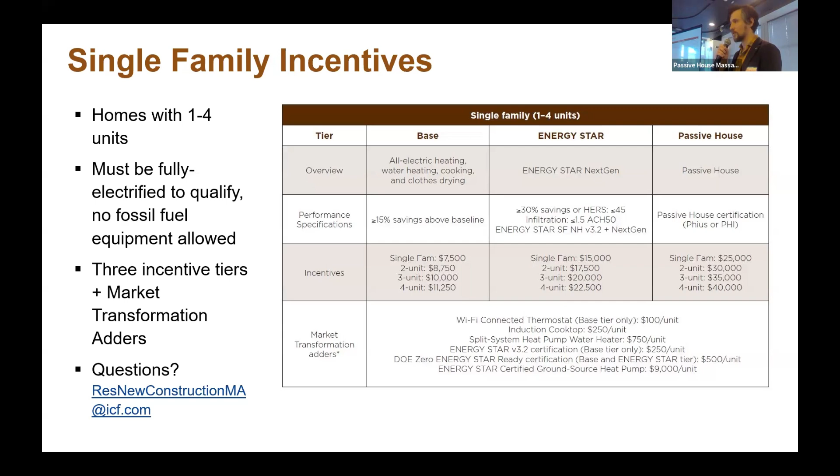There are single-family incentives, $25,000 for a single-family one-unit building, increasing for larger units. But as the topic of today's discussion and much of our monthly meeting series is multifamily residential, I'd like to particularly highlight the $750 Mass Save incentive for projects achieving certification with either PHIUS or PHI, and then $3,000 per unit. Both of these are per unit after achieving certification, again with either PHIUS or PHI. And that's in addition to other market transformation adders.

We're also going to talk about some strategies that we use at Callahan and Kurt's used at the Building Advisory Group, and how to really execute well and keep quality top of mind, which is really important for our PHIUS projects.

So I want to start just by looking at the life of a project, right? Overall, we go through site work, foundations, slab on grade, framing, envelope. There's components to each section here within PHIUS, but we're going to focus today on framing, envelope, MEP, thermal insulation, and substantial completion. And with that, I'm going to hand it to Kurt.

Great, thank you, Chris. So this first picture is really for PHIUS raters or verifiers in terms of the stud count. I've always found it interesting in multifamily construction that if they're going to assume you have one stud every 16 inches, that's a drastic underestimation of the actual count of studs. On this bearing wall, you can see it's all double studs, triple studs, kings and jacks are all doubled, with solid LVL headers going across. So in just that wall assembly, I'm guessing it's probably 30 or 40% reduced in insulation value.

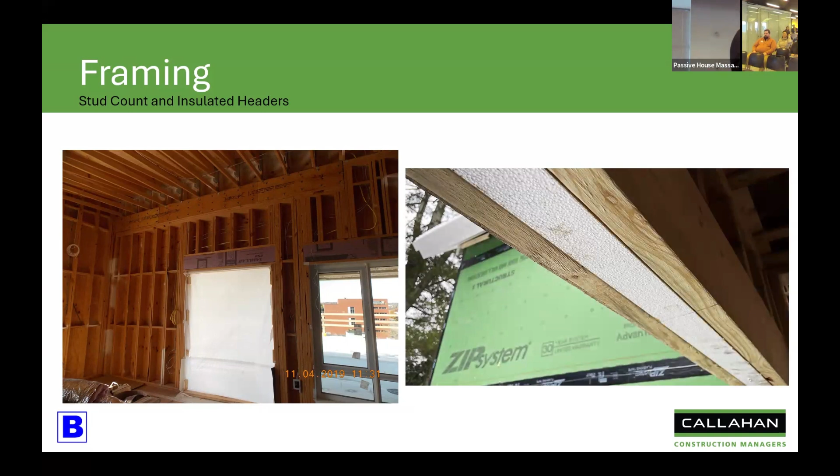So if we can insulate headers, door and window headers, it's recommended if the structural loads allow it. You can see that these headers here are thermally broken. Doesn't always happen, but it's recommended if we can do it, we should.

This is one of Chris's projects in Salem. What Callahan found out was that by changing the exterior sheathing to ZIP System, you no longer had to prime the OSB for your WRB. So it was a cost-effective move to change your cladding.

Okay, we're going to the envelope.

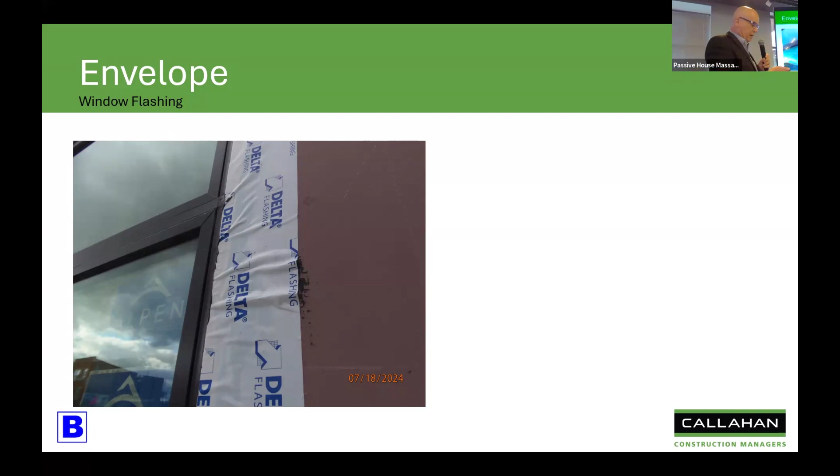This project here, it's critical to always get your flashing, taping and membranes flat and flush. You can see in this photograph, you've got wrinkles where there's going to be air gaps, so there's a chance your window might not pass air pressure testing due to this flashing installation. Here's a photograph of the way we'd like it to look.

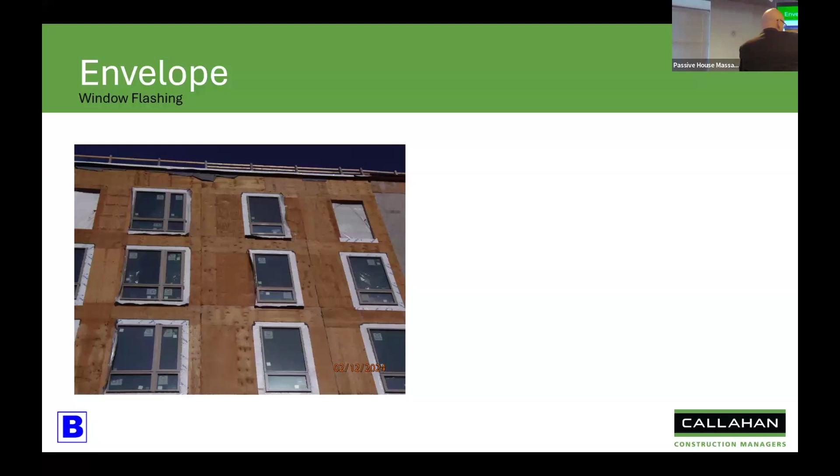On this project, all of the pre-flashing for the windows peeled away from the substrate. We never found out if it was due to temperature or moisture control issues, but every single window, the flashing came loose around the perimeter. So by waiting until the wood dried out, we installed primer around all the windows, and that allowed the pre-flashing to re-adhere.

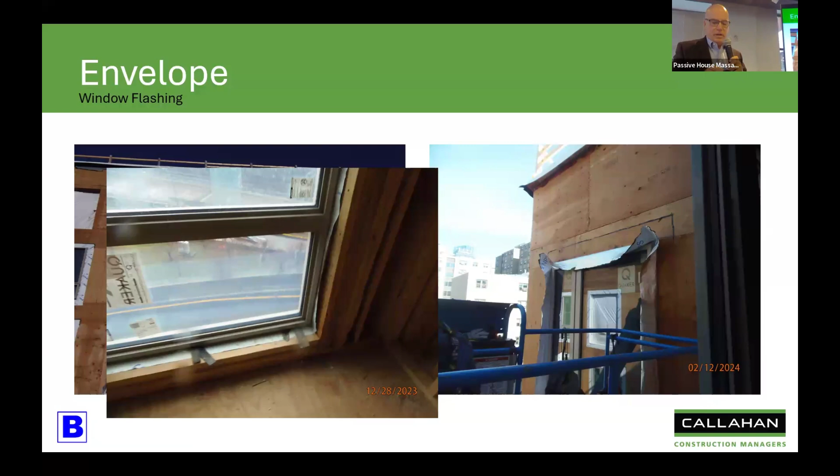It also came loose on the head jamb and sills. On these, a heat gun was used once the moisture content of the framing dried out, and it was able to re-adhere. We had to have SIGA come in and do pull tests to make sure the adhesion was correct, and again, just to make sure our moisture content is correct for all the materials being installed.

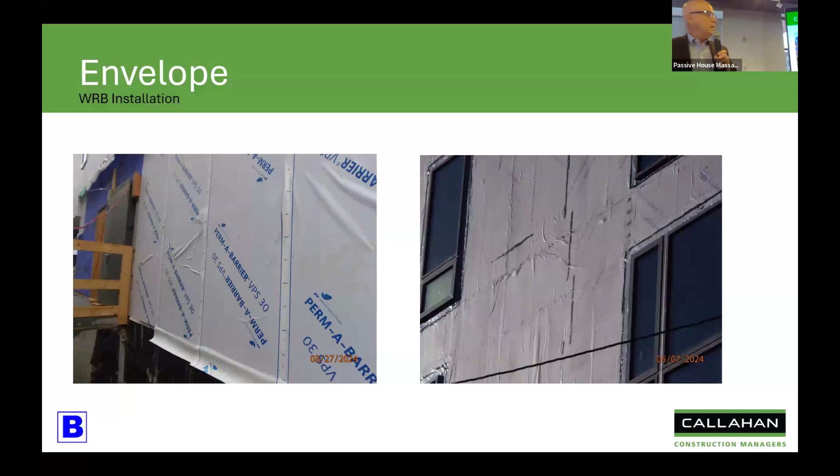Again, another photo of how a deficient WRB is in place. The substrate needs to be flat and flush prior to the WRB. When you have protrusions on your skin and install the structural girts, there's a chance you're going to create a penetration through your WRB, so all of that needs to be smooth before the girts are installed.

In this photograph, the mason was searching for studs for all of his anchors. Every inch or so, he'd drill a pilot hole through the envelope looking for the stud, and then your waterproofing contractor would have to come back and patch all the holes he made. This kind of issue is really resolved with communication. If your subcontractors understand the process and principles, hopefully they won't be doing this.

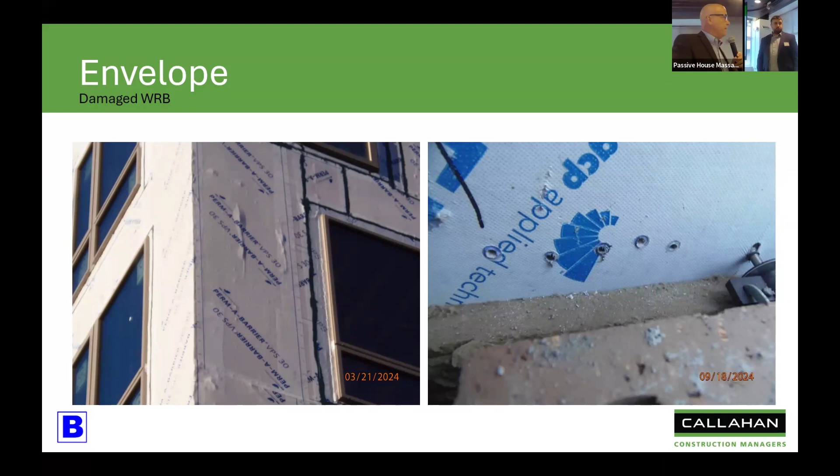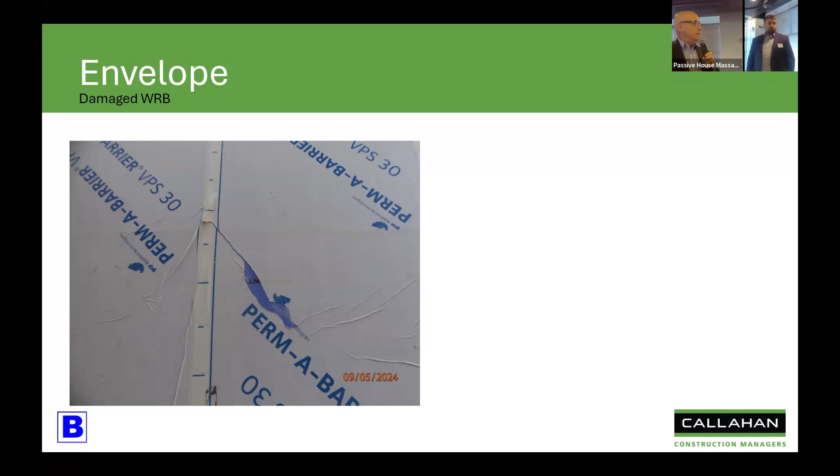Again, just a tear - the WRB is so sticky that you can't just peel it off and reapply. When you try to peel it off, that's what happens. So it's a nightmare to try to fix deficient WRB.

This photograph, the girts that were installed were in the wrong location, so the cladding contractor had to remove all the girts, and that left holes in the WRB. So again, your waterproofing contractor had to come back and patch and repair every penetration that was made.

Mock-ups - make sure that you get mock-ups for almost every system involved in your building. Make sure all the material is procured well ahead of time - your windows, your clips, your cladding - because it needs to be done well ahead of time, so that it's an actual in-place mock-up of the true conditions of your construction.

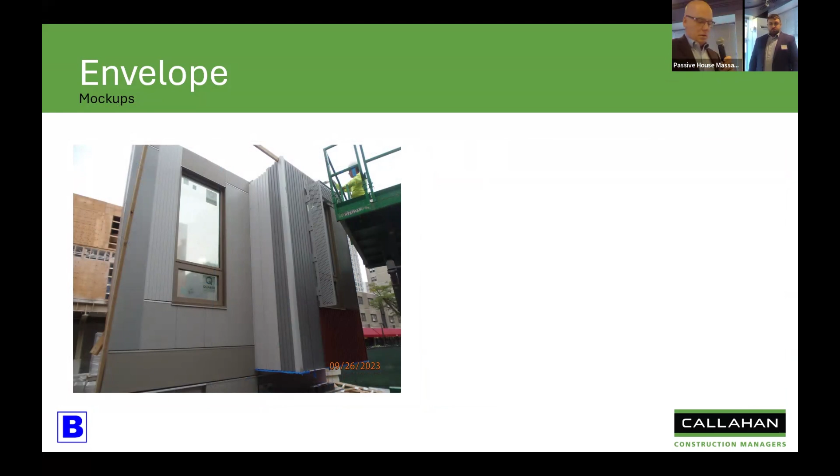This window mock-up in Chicago was fiber cement boards, all pre-drilled, so the girts had to be in the exact locations. We spent weeks and weeks going through this window mock-up until it was done right. We suggest you don't do your window testing until all the cladding is done, because the cladding is going to create more penetrations. So we always recommend window testing be done after the cladding is complete.

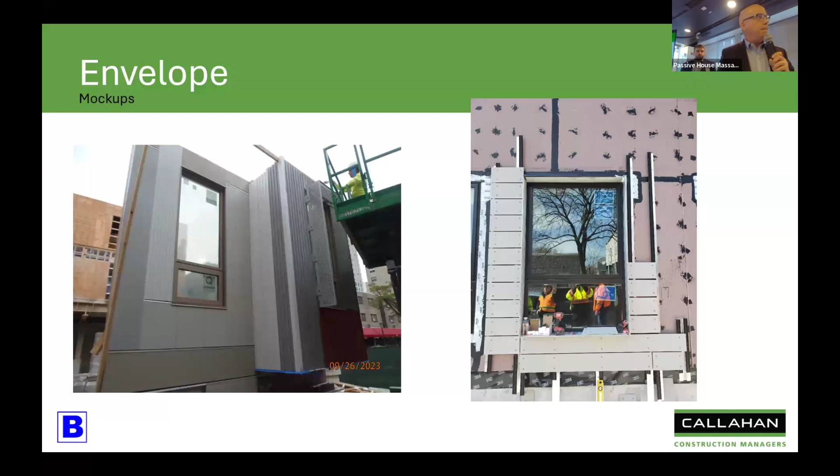This is the same project in Chicago. All the windows were installed in the factory, brought out to the site - insulation was done, pre-flashing was done, windows were done. So you can avoid the issue I showed earlier where all the pre-flashing failed in the windows.

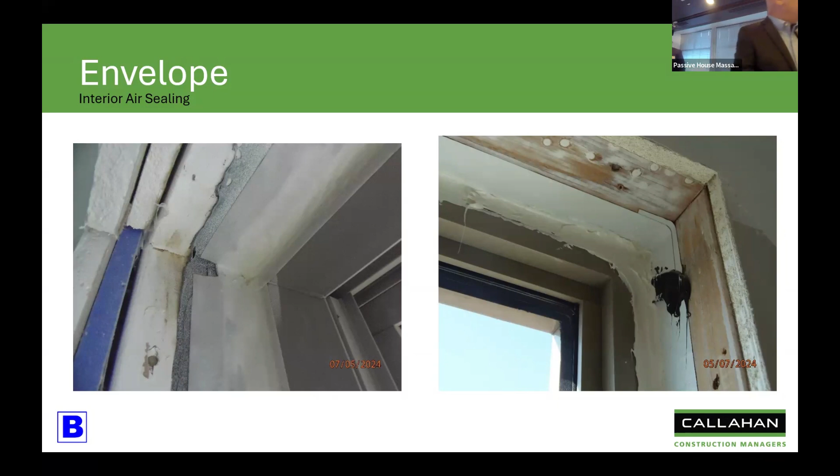For interior air sealing, typically use Fentrim tape that seals your window frame to your pre-flashing, but the Fentrim tape needs to be continuous, especially around the inside corners. Caulking needs to be done with care, needs to be tooled into the joints for a better air seal. You can see in that picture, that's not what we want to see for caulking.

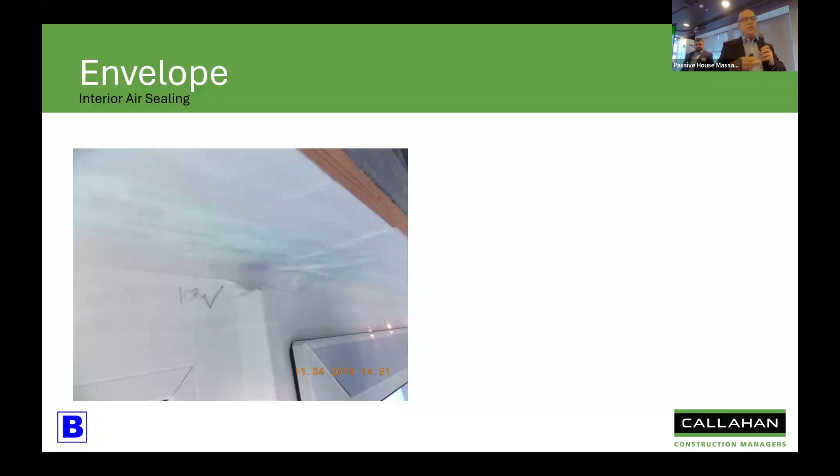When windows are mulled together, there's a chance that the mullion or snap cover is going to create an air loss. This is the top of the window head, and it was not passing our air test because air was getting down through the snap cover and through the window frame. So it's really ideal if you don't mull windows. You obviously can, and most jobs do have mulled windows, but your air testing is going to get better results when you have single pane windows.

This is the same picture at the sill where the Fentrim tape was applied to cover that snap cover. This window was removed and relocated, so you can see all the nail holes from where it was originally installed. It's going to get taped, but it just leaves another potential for air loss.

Keep in mind this window shim - I'll show you in the next photograph why that's important. If that window shim isn't taken out, the Fentrim tape is just going to run over it, and that's going to leave a gap on each side of the window shim.

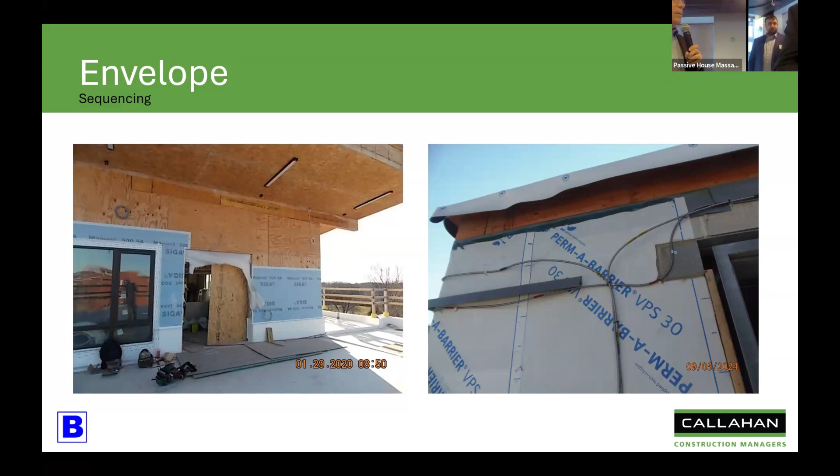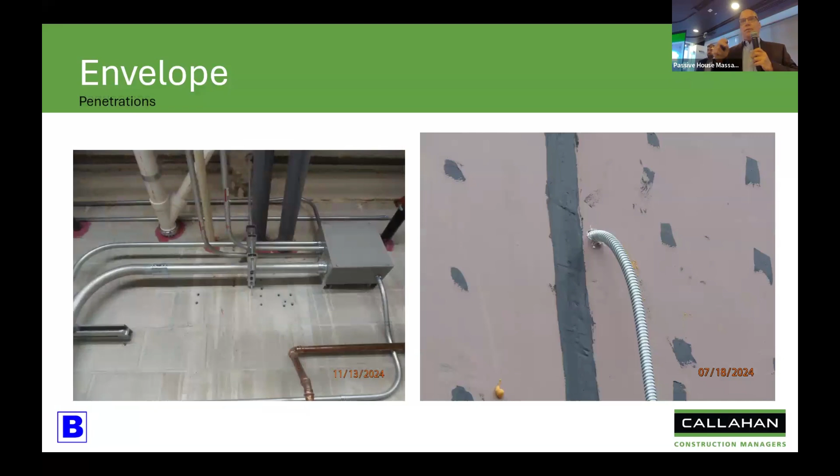CMU walls - every penetration should be sealed. So when you have MC cable or wires penetrating through your exterior wall, it's best to have one hole and one wire. Don't make a bigger hole for two wires, because it's much more difficult to air seal.

The windows are typically triple glazed in passive house construction. They're very heavy, and you can see that the way these were being stored on site was putting a significant load on the window mullion, which could potentially affect the air seal and the integrity of that joint.

Also, the dust and debris in these units will get into your windowsills. Typically, if you have that kind of debris in your windowsill, the window is not going to close - it won't seal tight to the gasket. It's a potential for air loss. So when architects do your punch, it's important to open up every window and look at the tracks to make sure they're clean.

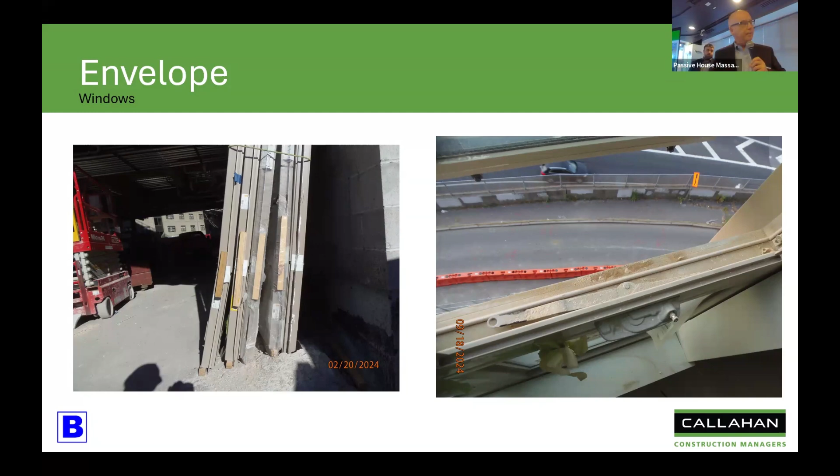Termination and protection of membranes and flashings. You can see in this picture that was the finished condition. The architects need to make sure that every condition, and there's a lot of them, is going to be terminated and protected so that you don't leave these kinds of exposed conditions.

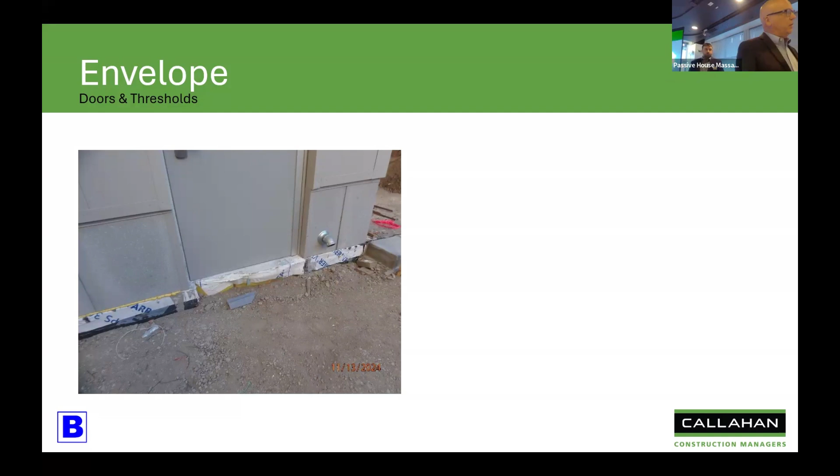This photo is just a liquid membrane on the CMU as opposed to the peel and stick WRB.

All right, so just because it's installed properly the first time doesn't mean it's not going to get damaged over the course of construction. You can see here this is the corner of a building - it was a tight site in Cambridge. What ended up happening is the skid steer drove by and clipped the corner just a little bit too tight. We noticed it.

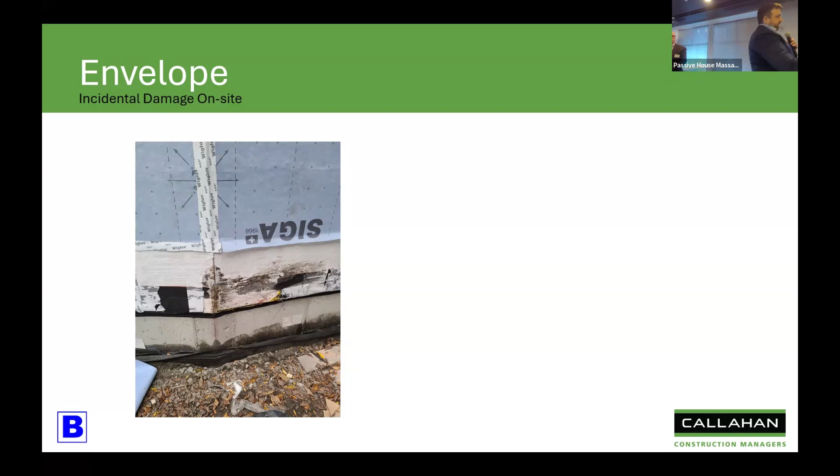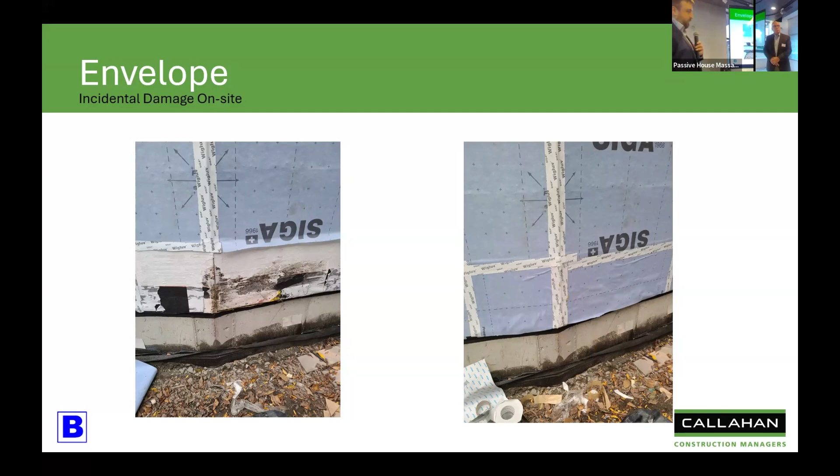The WRB installer went through and tried to fix it. It might be hard to see here, but they fixed the SIGA wrap, but what they didn't do was tie in the Fentrim tape to the underside of the SIGA wrap. So you still end up having the air seal issue, where you don't have continuity between the black Fentrim tape on the underside of the sheathing tying up into the SIGA wrap. Just because they fixed it doesn't mean they fixed it right - we've got to make sure we're looking for the QA/QC in order to make sure we're doing it properly.

Sometimes it's not quite as obvious - sometimes we end up with material hitting the corner of buildings, and we end up busting the corner up. If we weren't looking up, we probably wouldn't have seen this. So again, just paying attention to the potential issues that happen after the material is already installed is extremely important.

The way that we do that at Callahan is we actually go through and do a QA/QC inspection as soon as it's installed to make sure it's installed properly, and then again right before anything is going to go over top of it. We do that by - you can kind of see here - we take a marker, so on SIGA we can just take a marker.

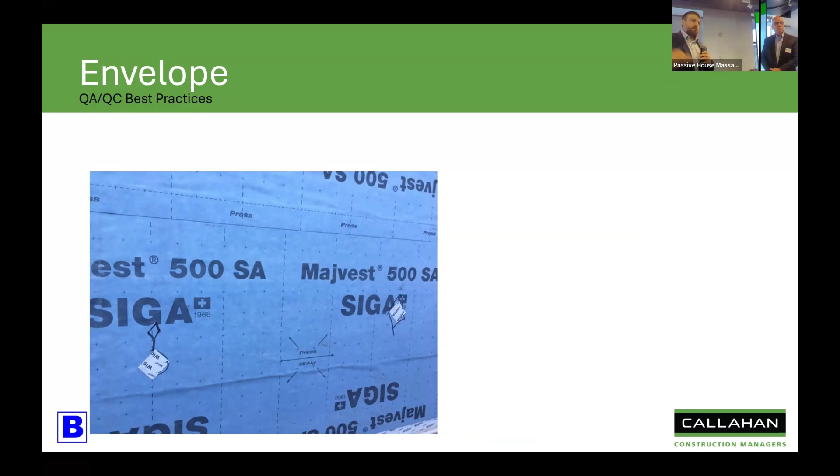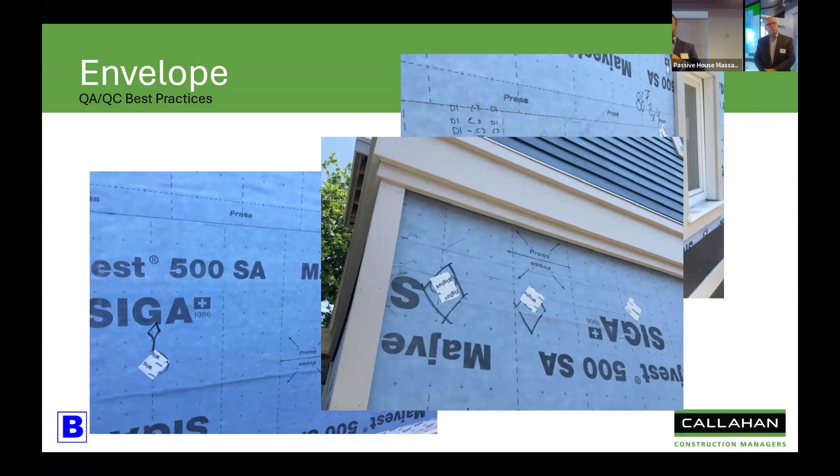We actually go through and get up on the lift or ladder, whatever means we need, to view all the different parts of the WRB, and we mark them up. Then from the ground, it's very easy to see if they completed all the patching required—you can see the circles and arrows. Sometimes I miss it, right? So it's important to do the QA/QC right when they install the product to make sure it's installed right the first time. But right before it gets covered up, if you don't make that last check, you're going to end up with holes you're never going to find.

So I want to take this a little bit different route. When I do passive house drawing reviews as a builder, there are two locations I really look at to make sure there's continuity in the area. The first one is the trash rooms and trash chute, and the second one is the laundry room. Let's look at the trash rooms first.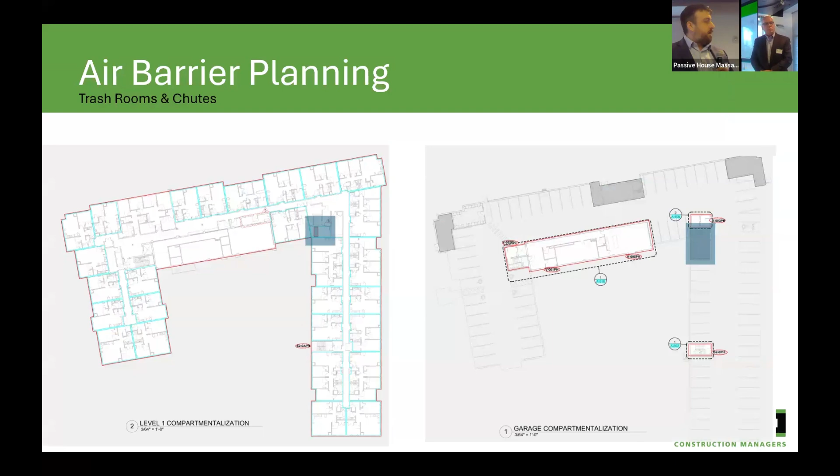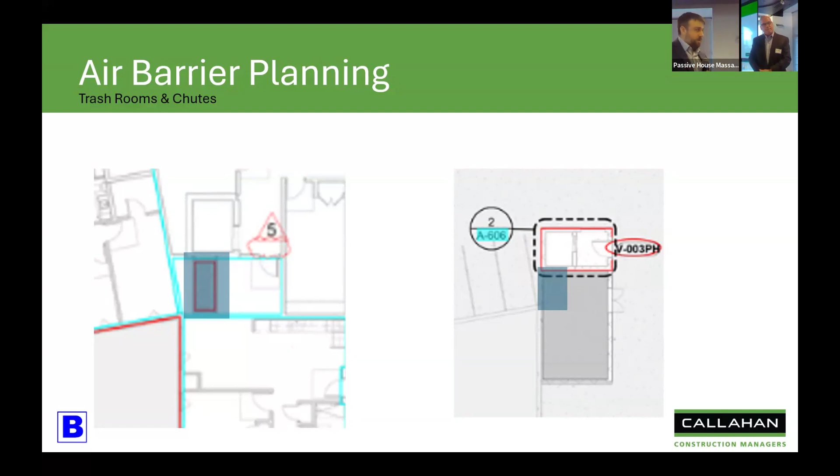On this job, the trash room is located right here in the corner of the building, and you can see this is the compartmentalization plan. They excluded the chutes in this job, and the trash room is also excluded, which is excellent, right? So we take a closer look at the detail here.

It looks like a pretty standard detail. As we zoom in, we see the air barrier located on the inside of the chutes, kind of sandwiched between the sheathing and the GWB, but that's a means and methods problem for us. As we look at this, we have a seal on the inside where the trash chute door is—that's our main leak, right? So there's a problem here.

If I have air coming down the trash chute, it's going to make it up into that cavity, get into the ceiling, and from there who knows where it's going to go—I end up with an air leak. So when I'm doing drawing reviews, one of the first things I'm looking at is the trash chute doors and the continuity of the air barrier, typically at the roof, at the trash chute doors, and then as it gets down into the trash room itself.

So how do we fix this? This is a super simple fix. We put in an RFI on this job and it ended up working out great—we're just going to take that AVB and wrap it right in so that it hits the gasket on the inside of that trash room door. That should eliminate that air seal leak.

So let's look at another project. This one's in New York—an 8-story block and plank building. You can see on this compartmentalization plan that they didn't exclude the trash chute or the trash room in this building.

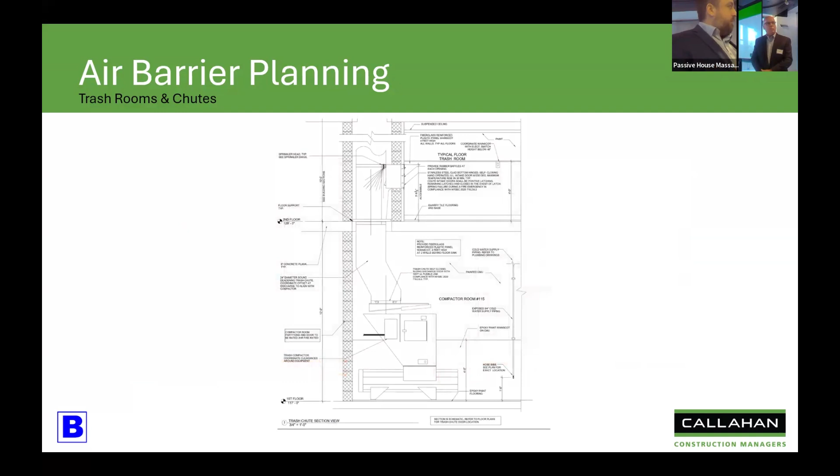Take a closer look—it's a singular chute with a singular compactor. But when we look at the detail, there is no AVB on the inside or outside of that trash chute CMU. CMU is porous; you will get air leaks through it, I promise you. If you don't get them right away, as soon as that grout shrinks, you'll end up with some sort of crack, which is an air leak waiting to happen. So we end up with a similar issue to the other job, but right now there's no provision to actually fix this.

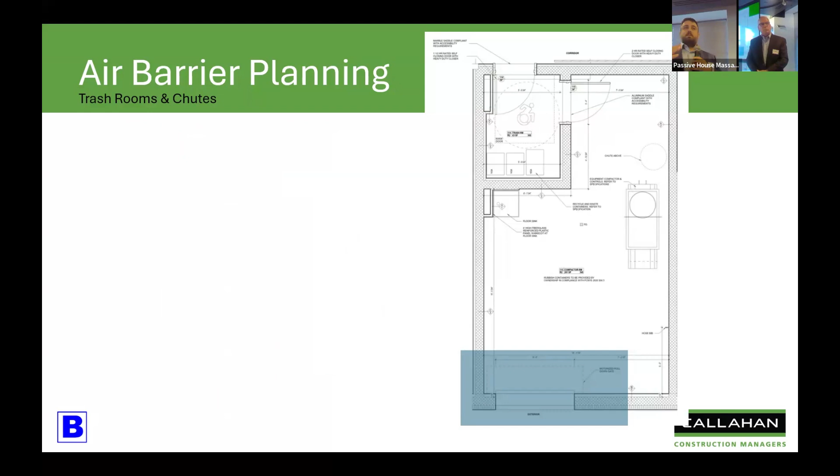So as of right now, there's an RFI in to see what we're going to do about this trash chute. Now if we go down to the trash room, the first thing I'm looking at is that since it's part of the compartmentalization, we need to make sure it's completely sealed. On this project specifically, they have a motorized roll-down gate. If anybody's tried to air seal a motorized roll-down gate, it's impossible.

Fun fact, right? So we go through and look at these things and say, hey listen, this is not going to work. As the builder, we want to provide you guys with a building that's going to pass, and in our experience, there's no way to do it the way this is going right now. So the easy thing to do would be to exclude it—we can throw a fire-certified door on the inside of the trash room, seal that up, seal up the trash room itself. Not as easy a fix as the first one, but still very fixable, right?

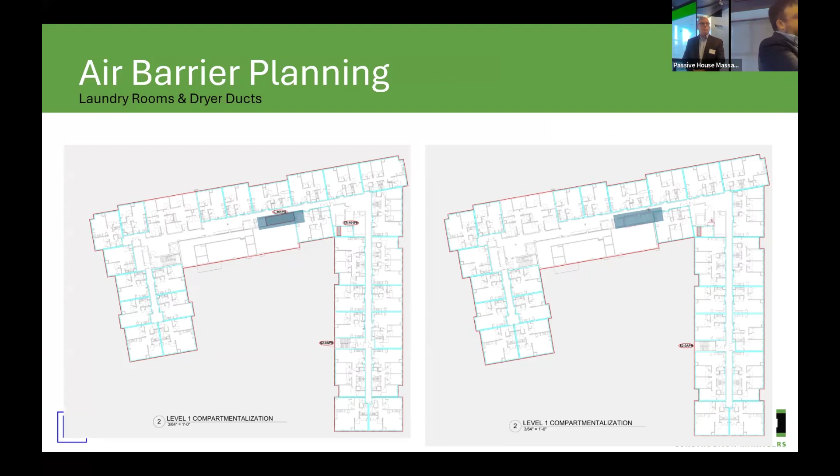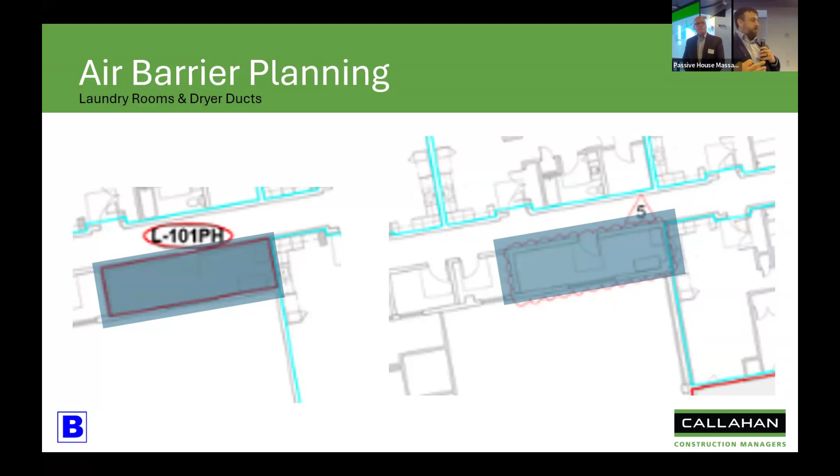Moving on to laundry rooms and dryer ducts - specifically dryer ducts are the problem because they vent directly to the outside. There are two options here, and this job actually had one part excluded originally, then they switched to including it. If you're excluding it, you end up having AVB around the entirety of the room, and on this job they actually had a fire certified door on the laundry room, which works great. When they moved it to be inclusive within the envelope, we ended up having to have an electronic damper, so that when the dryer runs it opens, and when it's off it shuts, so we don't end up with that loss. As a FYI, those are a pain to clean - if anybody's had to do maintenance on one of these things, it can be very difficult. So choose wisely on that one.

Midpoint blower door test - as we go through, it's great to do a midpoint blower door test. It's our way to make sure we're on track. We're only going to get worse, allegedly, as we go through the process of putting holes in the siding and putting all the facade on - we're only adding holes to this building. So midpoint blower door testing is extremely important, but it's extremely difficult to actually achieve, in our opinion.

The reason is that the form of the building makes a big difference. When we're doing our midpoint blower door test, the envelope should be complete, the roof should be complete, all the windows should be complete and detailed, all the storefront should be complete and detailed, doors hopefully complete and detailed - although you might have a couple outstanding. And if you're really crushing it, you've got your MEP penetrations out and those are detailed as well.

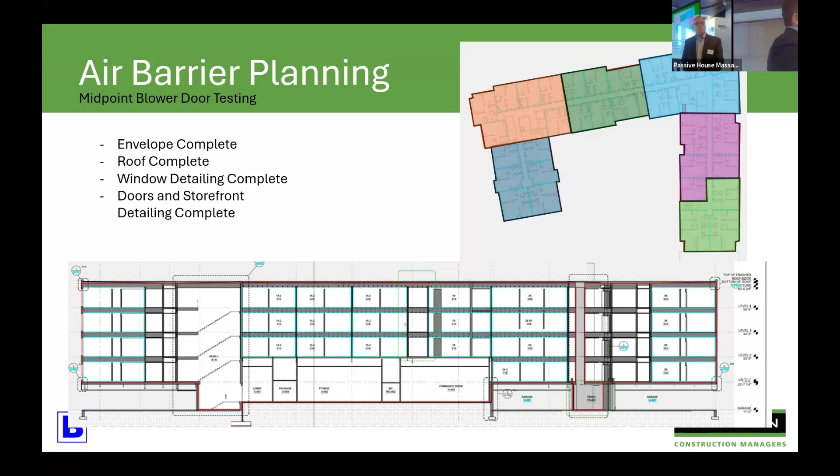For this particular job I looked through the schedule - this job is currently being built. In order to do this midpoint blower door test, at that time when all these things are complete, this section of the building is doing finishes, this section is doing MEP rough inspection, and this part of the building, that finger coming down the screen, is doing non-weather tight MEPs. So we have a wide array of work happening at this point, and arguably half the building is completely covered in drywall. So it's going to be really hard to find an air leak if we do a midpoint blower door test on this project when we're actually able to do it.

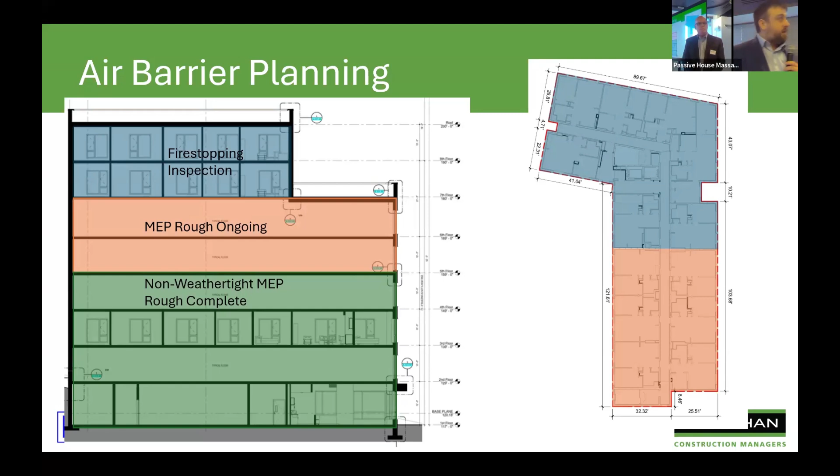If I put these buildings next to each other, you can see they're generally to scale here, but the form of the building makes a significant difference in terms of how we're actually able to accomplish this midpoint blower door test in a meaningful way so we can fix stuff on the inside. On the project on the left, there's a firewall here, and after talking with the team, it almost makes sense to seal up that firewall, and then you could do two midpoint blower door tests - we could have that air sealed off completely, or as best as we could, then do a midpoint blower door test on one side, and then the other side. And then with the exposed studs on the inside and the exterior sheathing, we can do some work from the inside or the outside.

It's not a significant amount of additional work, but it is a significant amount of thought that needs to go in to make sure that entire wall is sealed and the doors are sealed accordingly. If we end up having all the leaks at the wall we're trying to separate, it's not a really good test. We want to make sure we're doing a great job at that wall so we can see where the leaks are throughout the rest of the building.

So now we're going to talk about MEP penetrations.

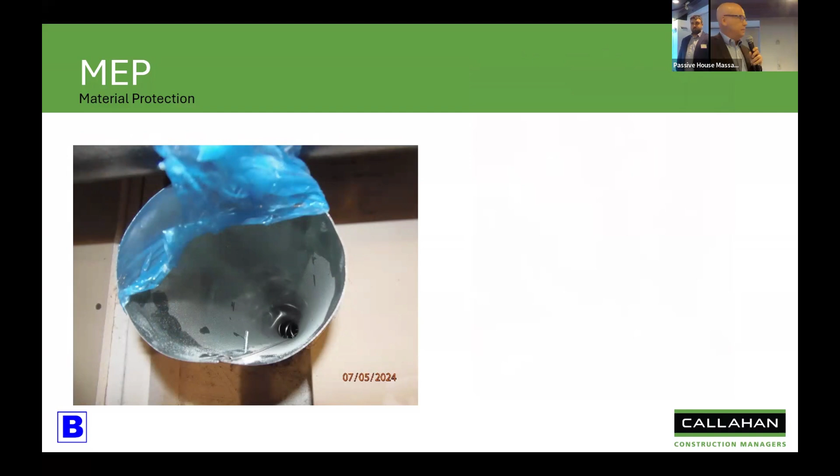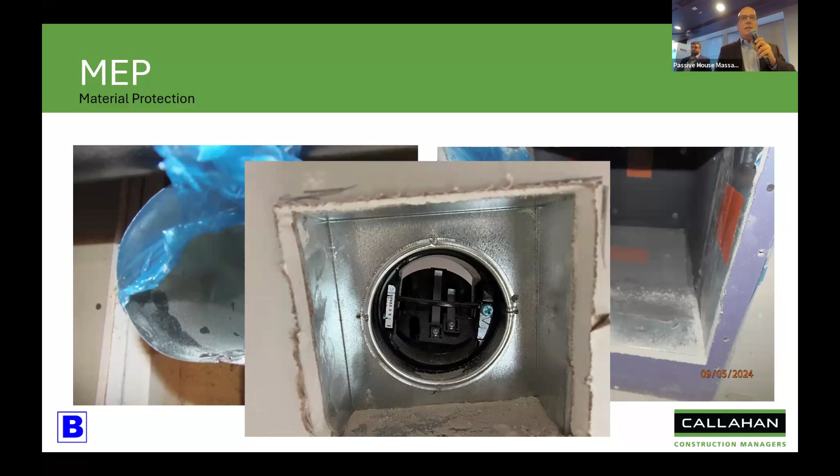So the notorious CAR damper. Same concern: the drywall contractor came in to route out that opening, and all the dust went into the enclosure, into the CAR damper itself. So as that's operating, it's going to be blowing dust, and there's a good chance the dust could compromise the operation of the CAR damper itself.

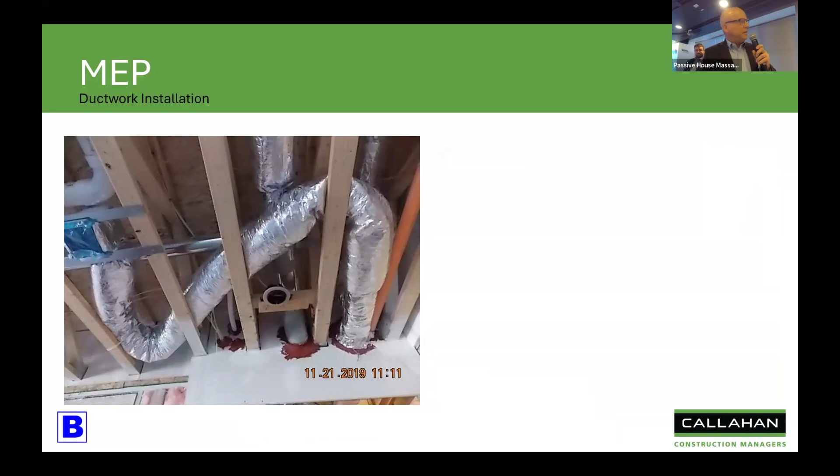It would be great if all the ductwork could be run in straight lines, but we understand that's not possible. You can see in this photograph there are significant areas where it's cinched, and you're probably going to get reduced airflow.

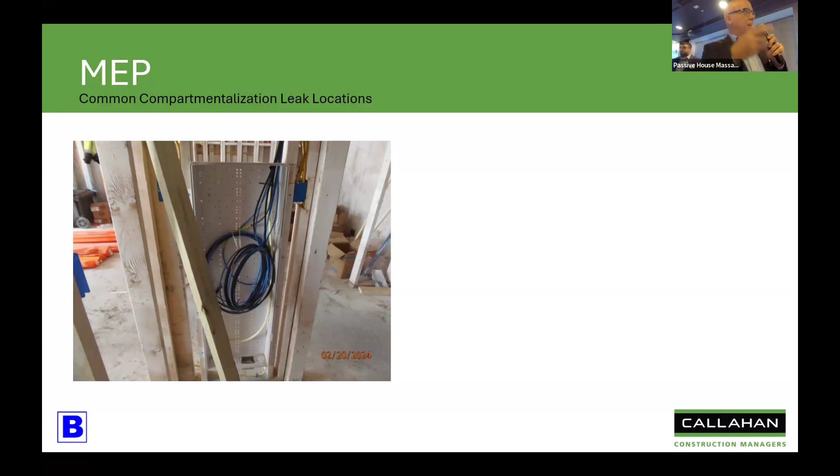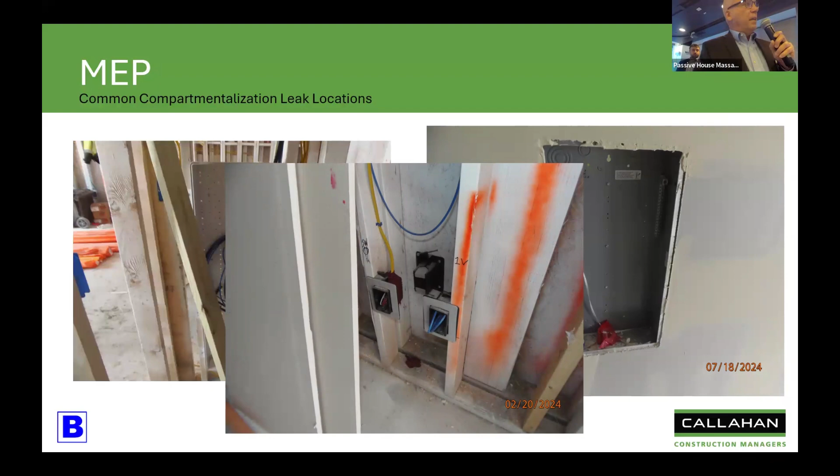Same consideration with the electric panels. Again, in terms of air sealing, junction boxes all need to be gasketed, and the putty packs in the back can seal the hole where your wire comes into that junction box.

Thermal insulation. When you have podium style, you're going to have thermal bridging on a lot of your columns, posts, and braces.

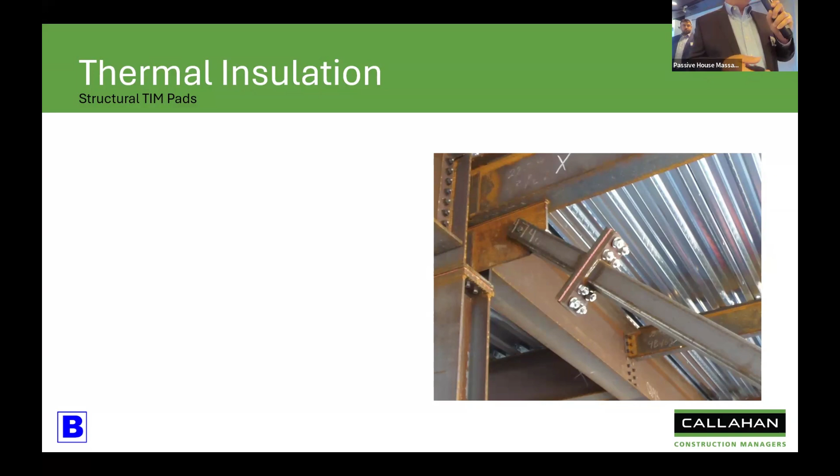You can see in this photograph that stainless steel bolts were used. It has a much better thermal resistance than the A325 bolts. But the problem with this is that the thermal break was 2 feet below your insulation, so this portion of the brace is going to be exposed to the cold weather. It needs to be within your insulation cavity. One of these costs about $3,000 or $4,000, so not only is it a waste of money, but it's not efficient.

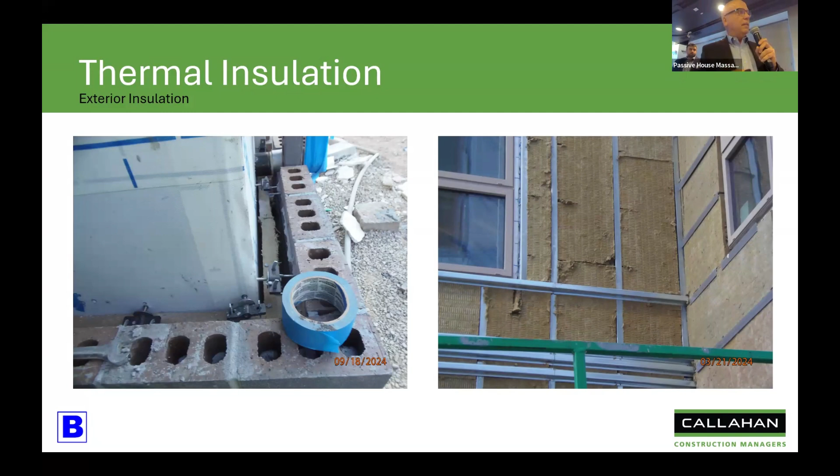We also need to make sure it's installed and cut clean. There shouldn't be gaps or rips. The installer needs to understand that it should all be cut to fit with square edges and clean pieces.

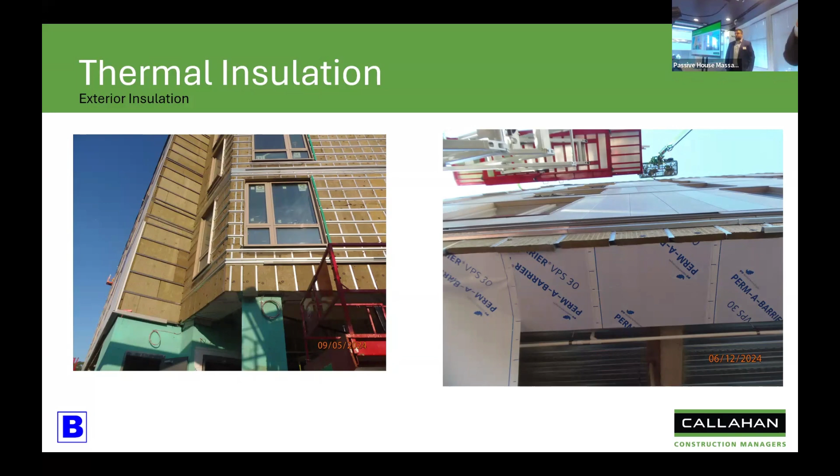This photograph shows that some rock wool is mechanically fastened and others is just laid inside the girts. My personal opinion is that none of it should be friction fit, it should all be mechanically fastened. Because while it looks good there, you can run into situations where the rock wool does not fill the cavity of all the girts, so there's a 2-inch gap at every one of those girts. If you took that across the entire building, there would be a significant thermal loss.

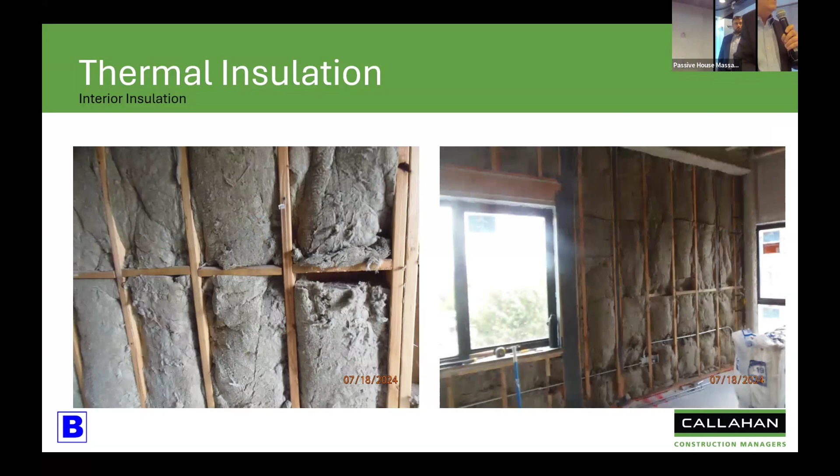Here you can see it better. So from the outside it looks fine, but it's just not filling the entire cavity, including inside corners. Again, a quality install should all be grade 1. Here's another photograph of a poor installation.

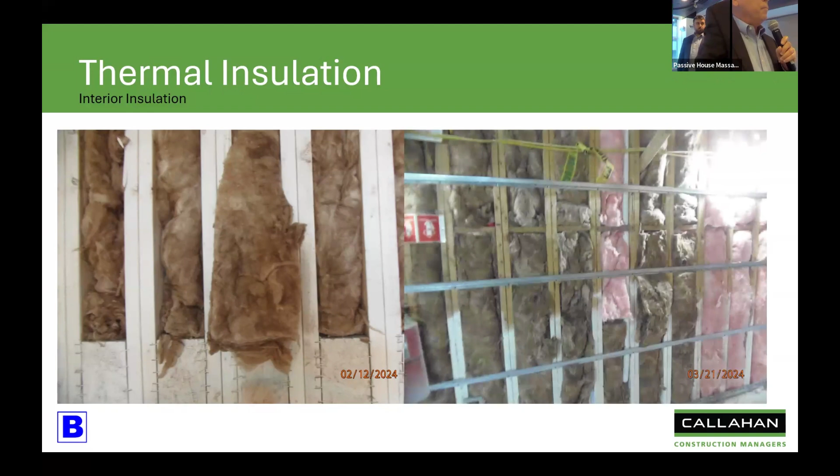Same with fiberglass batt insulation, it shouldn't be over compressed. It should be cut to fit snugly within the studs. Here's another picture of it just being over compressed.

A lot of these issues would end up being revealed during the thermal imaging process at the end of the project, and you don't want to jeopardize certification after all that with poor insulation.

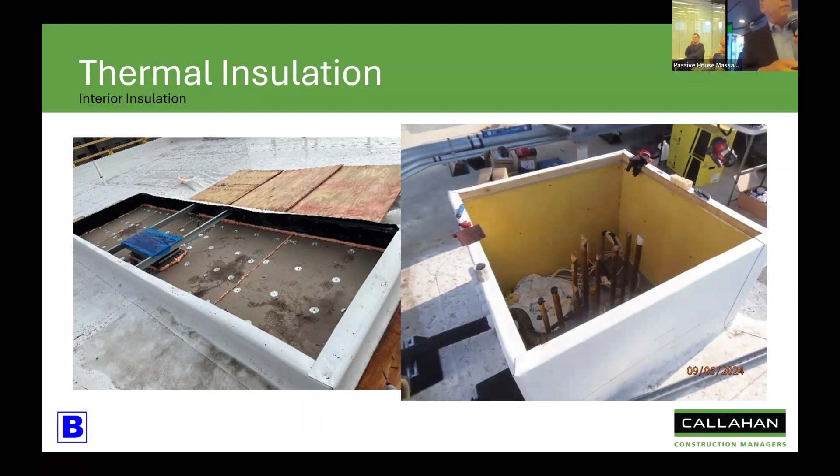Mechanical roof curbs: we should carry the same roof insulation that we have across the roof deck through all of our curbs. This is a thermal loss if we don't do that. I know from past history that a lot of details don't show roof insulation being continuous through the curbs, and even the refrigerant boxes need to be insulated as well.

Just a quick story on this project: the shunt trip on the door malfunctioned. This ERV was serviced, and when they shut the door, since the shunt trip wasn't working, the ERV did not start. For 3.5 months the ERV did not run and nobody knew about it because there was no notifier, no auto dialer. So something to think about when we specify equipment is it's best to have some type of notification that the equipment is running and operating properly.

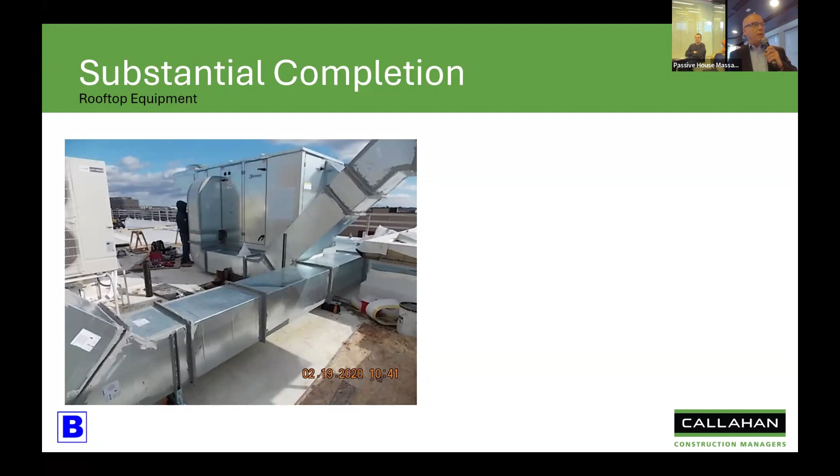Halfway through this project, Eversource told us that we could not export power back into the grid, and I guess it's shame on us for not confirming with Eversource that that was the case. We had to redesign the solar array, engineering basically a backflow preventer to prevent any power from going back into the grid. It's just a frustrating circumstance.

EV charging stations: it's important for architects and owners to understand that EV charging stations are not in our energy model. So if you want to see how your building is performing once it's fully occupied, you need to take out the power from your EV charging stations from your power consumption.

A couple of things we run into on the construction side for substantial completion: the balancing at the end of the job, making sure you have the low flow hood. This tab person did not have that, and they ended up having to go out and get one in order to complete the balancing of this building.

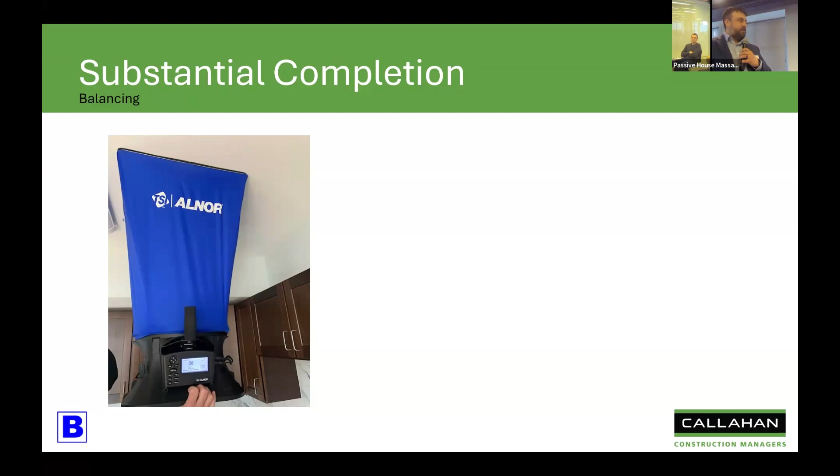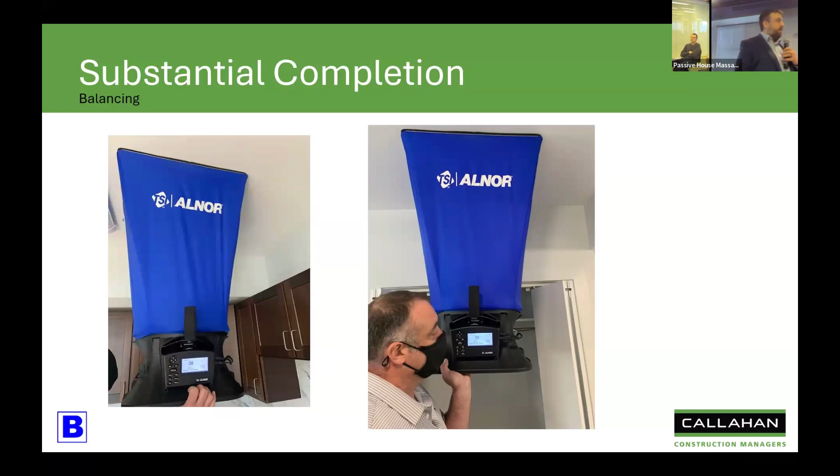We also had volume dampers on the diffusers, which was not ideal either. We were having a hard time getting the proper readings and being able to force the air back down into the first floor.

Last but not least, obviously the blower door testing, this is for compartmentalization. I didn't have a picture for the full building, but making sure we're telling the trade partners that they can't be entering and exiting the building. I know it sounds silly, but they're not thinking about it, they're not used to doing blower door tests, they don't understand the impact. So making sure they really understand, hey, this is happening right now, you cannot walk through the building. Even doing it on a weekend or just shutting down the job entirely so this work can be done is a good way to do it.

So we've talked about a lot of problems and issues that have come up. Now we want to talk about some strategies we can utilize for success.

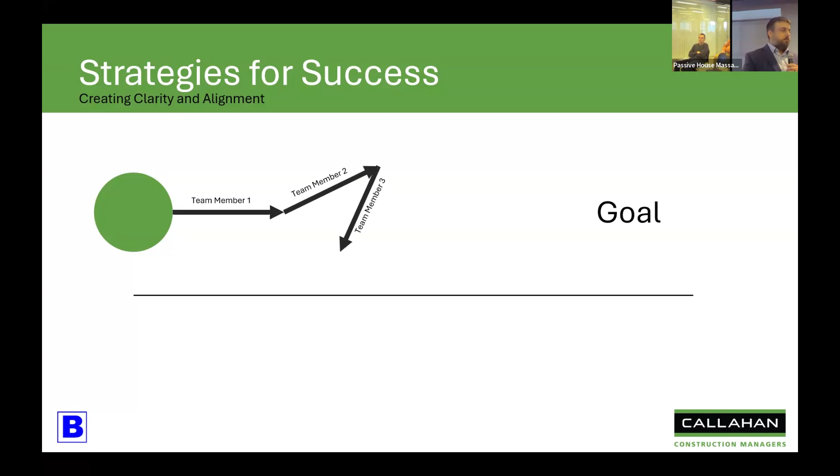What does that look like? I have a couple of examples, but the one we use here is for compartmentalization. There was a shear wall. The electrician said, 'I got a sawzall, we'll just rip a hole open, it'll be fine.' They did this throughout the entire building, and it was a massive problem because no one caught it ahead of time.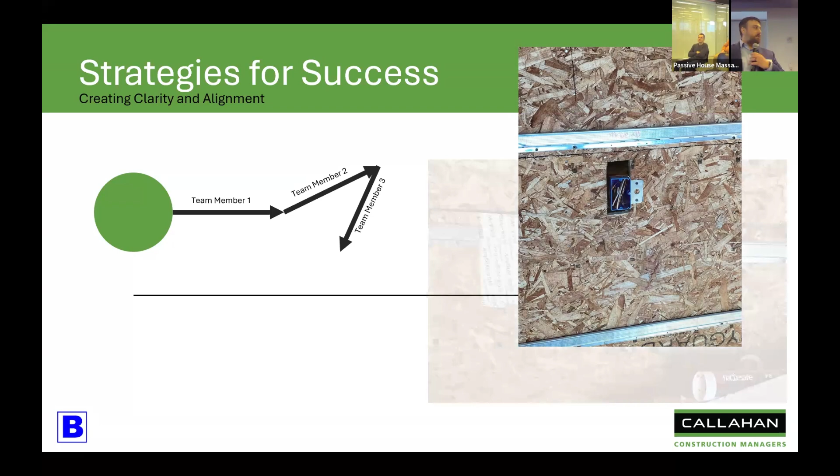So what does that mean? A lot of extra labor, time, and materials end up getting put into fixing all of this - putting wood glove tape on all these different locations and putty packs on the back to make sure we passed. That's what team member number four had to do. And look how far away we are from our goal.

All these lines are level of effort. Now, if we had clarity and alignment, if team member number one was able to articulate exactly what they required, although team member number two might not go exactly the same direction, they're going much closer. Same with team member number three - they're not going exactly the same direction, but they're going towards the goal, which means when they don't rip up all the sheathing to put that electrical box in, we're going the right direction. We can then focus on other things to get to that goal easier and more efficiently.

All these lines are the same length - we consider these all to be the same level of effort. It's clear that when we screw up, which obviously makes sense, it costs a lot of time, a lot of money, and a lot of effort.

So how do we create this clarity and alignment? The first thing we like to do is hold kickoff meetings.

A lot of people are new to PHIUS - they don't entirely understand what air sealing is. What I like to tell them when I do these meetings is we're basically trying to put a bag over the building. We're trying to air seal it, make sure there are no holes in it, so we have a nice tight building, and then we mechanically bring in fresh air.

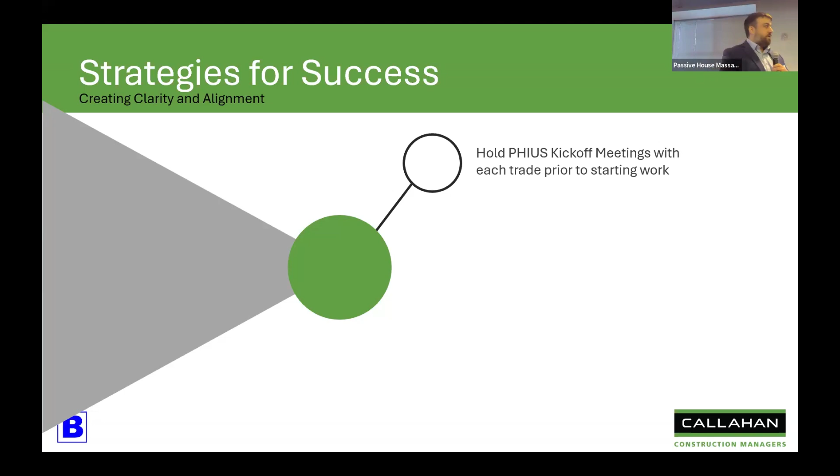So we have these meetings with the trade partners - sometimes in the trailer, sometimes out on site. If we have a tricky detail, we want to get out there and point to it and actually talk about what exactly needs to happen.

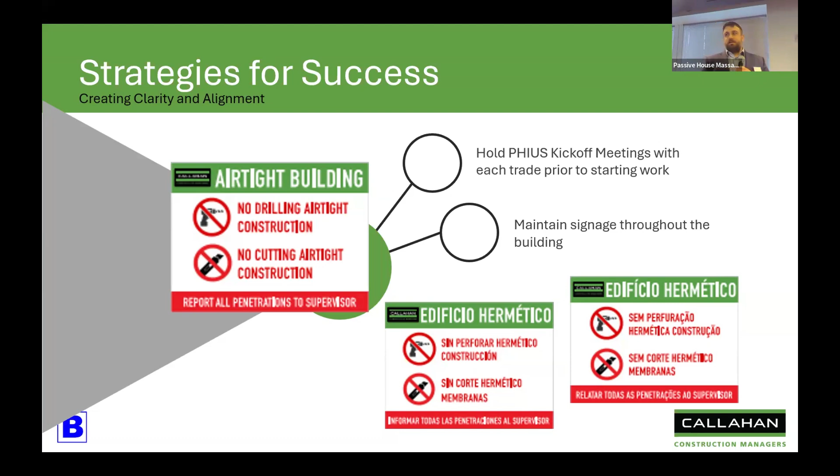We maintain signage throughout our building. We happen to have it in three languages - English, Spanish, and Portuguese. We also mount these to the lifts. The people most likely to put holes in your building are the siders, masons, and people doing your facade. If they're up on a lift and there's a sign saying 'don't put a hole there unless you're going to fill it,' they're less likely to cause that damage.

Identifying verifier inspections - this is a huge one. Coordinating verifier inspections is extremely difficult on the construction side. Sometimes things move day to day, and we need to give a week's notice, possibly two weeks, depending on the verifier.

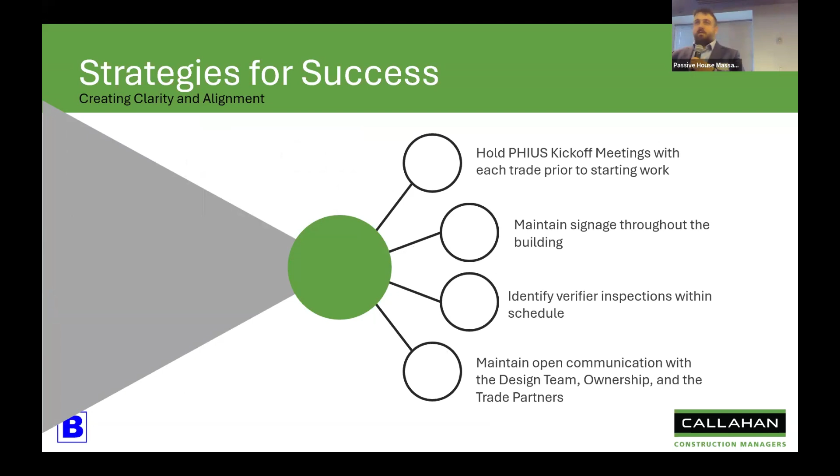And last but not least, and I can't emphasize this enough, having open communication and trusting that we are not just throwing stones with our reviews. What do I mean by that? We're a team. We're all trying to build the same project. We're all trying to be profitable on it, right? We're not trying to be a pain. We're trying to get this done together.

So having that open communication between the design team, the ownership team, the trade partners, right? We all want to do this together. And if I go back to that clarity and alignment with the goal, what we're trying to do is do it efficiently and effectively, right? So if there's anything you take away from this, that open communication, which is really trust, that we're all trying to get to the same place, is extremely important, and conveying that trust to other people.

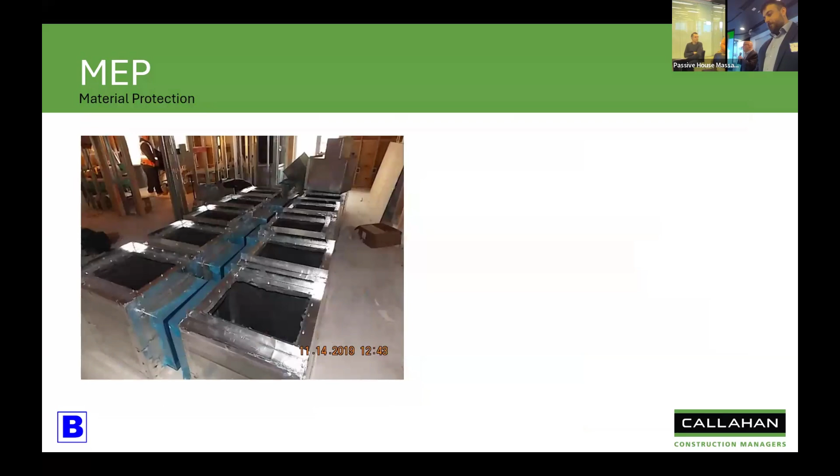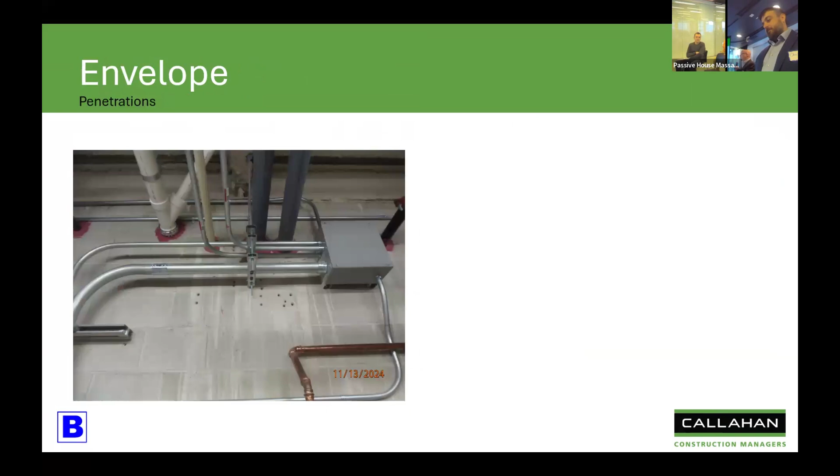Can you go back to when you said that you used plywood CDX instead of OSB because you didn't have to prime it for the vapor barrier? And then you did also have a picture of windows where flashing didn't stick, where you said you had to go back and prime. Was that also CDX? No, that was OSB. Two parts of the question, I'm sorry. So if you're using plywood instead of OSB, you don't have to prime before you put on your... it depends on the manufacturer. So could you tell us which manufacturers you were working with when you didn't have to prime? And then could you also explain why you had to prime for the flashing to stick around the windows?

So I don't know with regards to the CDX and the OSB. I don't know, that picture is 2 weeks old, so I'm not sure what WRB we're using. On that project, we're using SIGA, SIGA Majvest 500. I went to Switzerland to the SIGA conference, and the primer is really necessary on the OSB specifically because the OSB is stranded, right, and it pulls away. It's not a smooth, flat surface. That's the real problem with the OSB versus the plywood, is the smoothness of the surface. You get more contact with the plywood versus the OSB.

And sometimes you can just ask them to reverse it, one side instead of the other. But for all the pre-flashing that failed, I still don't know what the problem was. I mean, it was either temperature or it was moisture contact. I assume it was done in the wintertime. We didn't get it all corrected until springtime when it dried out and warmed up.

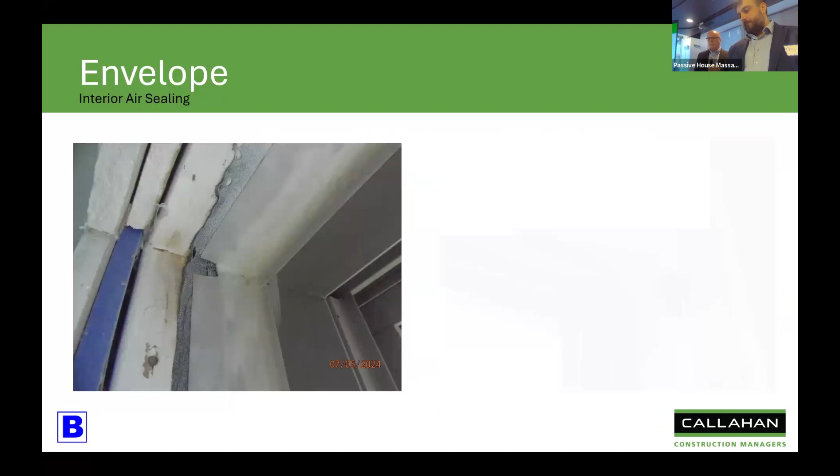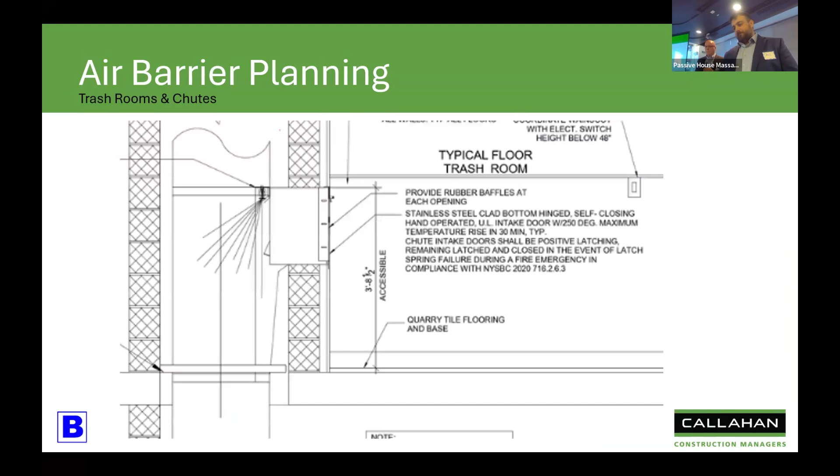Okay, now we have questions online. Kurt, can you go back to some of your slides showing the Rockwool insulation with those girts on the outside and how you have those gaps? One of the questions that was just coming up as you were presenting is if those were metal girts, and I was also a little confused looking at those slides. Because this is important, I believe, to go through and talk about this detail, could you explain a little bit more what's going on with that particular exterior insulation detail? That'd be great.

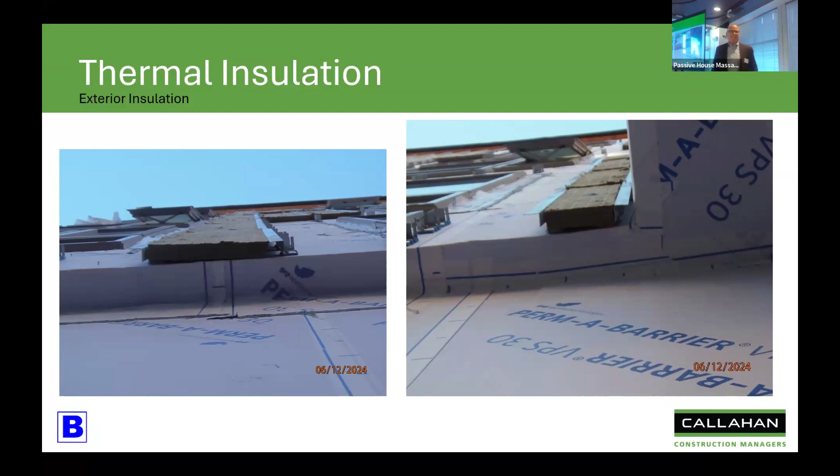I had a question about how you evaluate the schedule for the midpoint blower door test. I thought that was a really useful series of slides, particularly the suggestion to make a firewall a compartmentalization barrier where it doesn't necessarily have to be, other than to achieve a midpoint test. How often are you seeing proposed modifications to interior assemblies to help an exterior envelope test come up during construction, whereas I was looking at this from a design document standpoint before construction, that could be defined and written directly on the drawings. From a design standpoint, it doesn't seem like a huge change. It just depends on when that suggestion comes up.

And then maybe follow-up question after. Yeah, sure. So to be honest with you, we stumbled upon this when I was doing some reviews with one of my teams on this project in particular.

So in terms of the schedule question, what I did was go through with the visual schedule. It's super simple to see when it's weather tight, and then from weather tight, look at when the doors are going to be installed in the storefront, because sometimes that doesn't quite line up since it's typically on the first floor. We go through, pinpoint that date, and draw a line up to see where every zone of each floor is at, to figure out that graphic I put together earlier.

I think the building form makes such a big difference, and I think that's because the roof is such a large driver. If you have a smaller footprint but it's more vertical, you've got to wait for the roof to go on. Whereas here, I can put a roof here, roof here, roof here, and not have anything over there, and be working in all these zones. So that's the big part there.

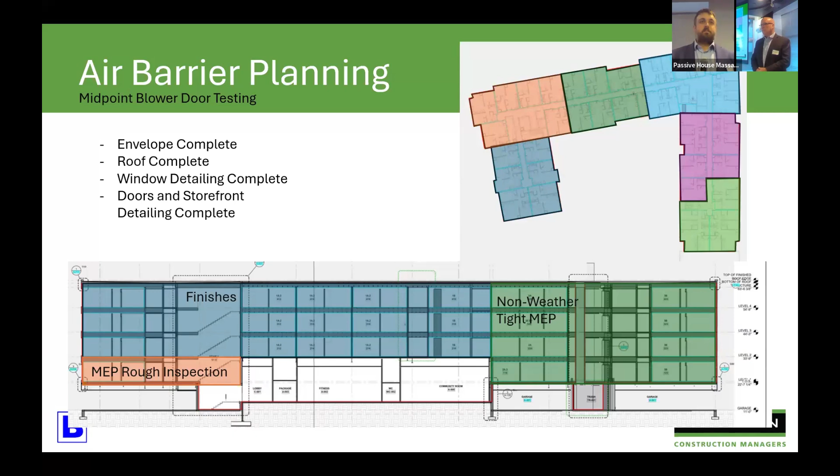Quick follow-up: the idea that there could be construction techniques that create reliability problems later, that pass fine at first but systematically make it less reliable over the life of the building. Did you encounter scenarios like that? Honestly, I have not. But that doesn't mean I won't find out 10 years from now, so hopefully not, fingers crossed.